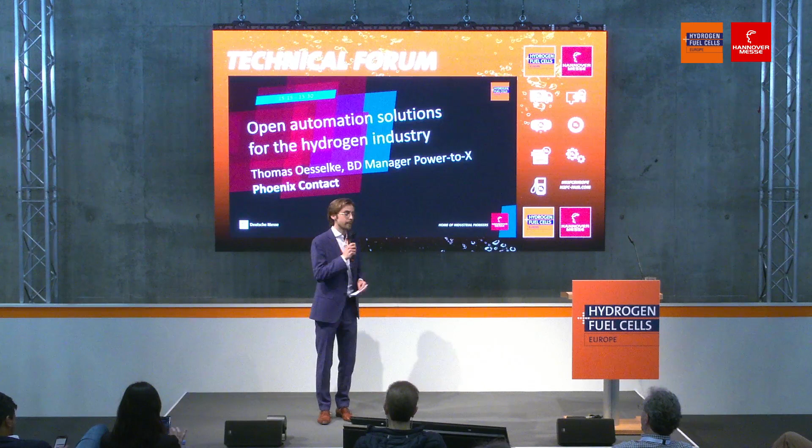The topic: open automation solutions for the hydrogen industry. On stage from Phoenix Contact, the Business Development Manager for Power-to-X. Can I get a warm applause for Thomas Oesselke? Many thanks for the introduction. So I can skip this one.

Today I want to talk a little bit about open automation systems for the hydrogen industry. I will briefly introduce Phoenix Contact, our company, and then as a second point I will talk about the characteristics of open automation systems, what's so special about that. And finally, I do not want to dig into too technical details, but I want to illustrate this in application examples, just to make it more practical for you.

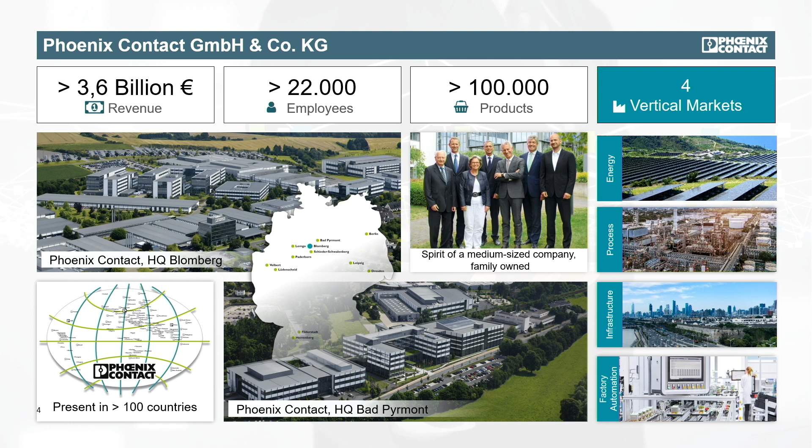Some points about Phoenix Contact. This year, this Hanover show is a very special one for us, because we are celebrating our 100th birthday. We are a 3.6 billion euro turnover company with 22,000 employees worldwide, located in Germany and still family owned. With our products from electrification, automation and connection technology, we are serving all major markets: the energy business, the infrastructure business and factory automation, but also especially process technology. This is where we also allocate Power-to-X.

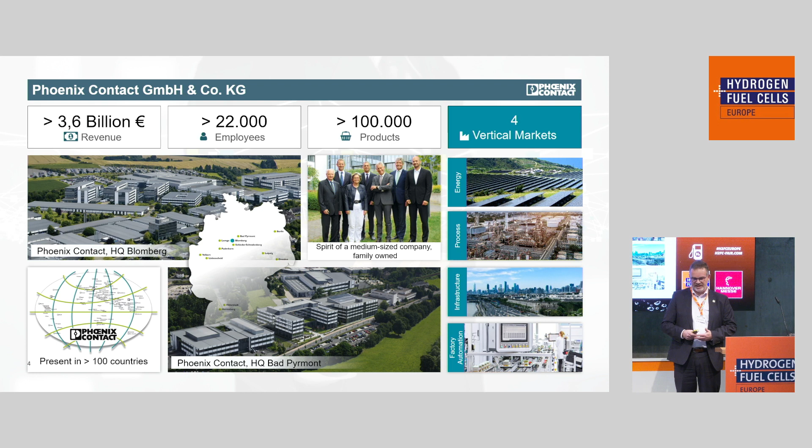Our competence for a carbon neutral future originates from our company DNA. It all started with connectivity in 1923, and over the years, the product portfolio developed into electrification, that means signal conditioning, power supplies, and finally also into automation technology. And we do not only supply components, but also services, for example consulting about functional safety, IT security, as well as intrinsic safety.

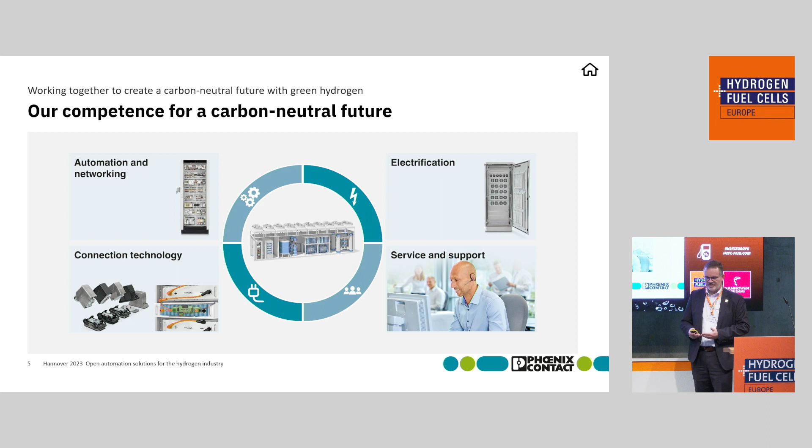So why is this so important? I guess everybody will agree we are living in very interesting times. Hydrogen is very rapidly evolving. However, the requirements of our customers, governments and regulations are also rapidly evolving. How can you cope with these rapidly evolving requirements? How can you ensure that your customer solutions maintain their functionality and availability? How can you meet new market requirements quickly, shorten your time to market, and especially, how do you react to constantly changing regulatory standards?

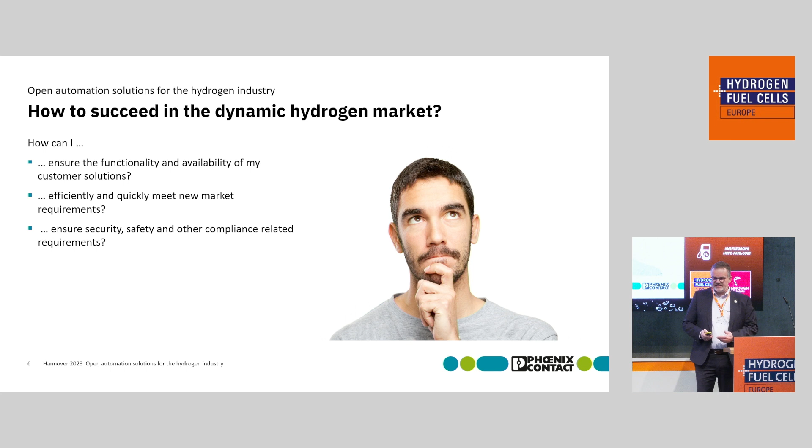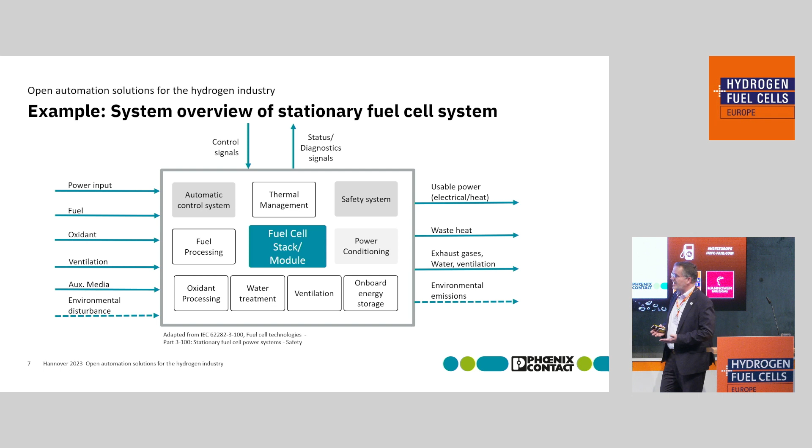Looking at the technical details, for example a fuel cell application, some of you will recognize this structure. It's adapted from the IEC 62282-3-100. The heart of a fuel cell application as well as an electrolyzer application is the electrochemistry, the stack in the middle. However, this has to be supported by lots of auxiliary functions like power conditioning, water treatment, ventilation, thermal management. So next to the heart, you also need a brain, and this is typically the automation system.

This does not only cover standard automation, you also have to deal with safety and security. You can have the ambition to develop the automation solution on your own, to keep your IP internally. But then you run into troubles like time to market. How do you react to changing requirements, to the constantly growing demands concerning IT security, functional safety, and so on? So the other idea would be, why not use an open automation system? And first the question is, what are the characteristics of an open automation system?

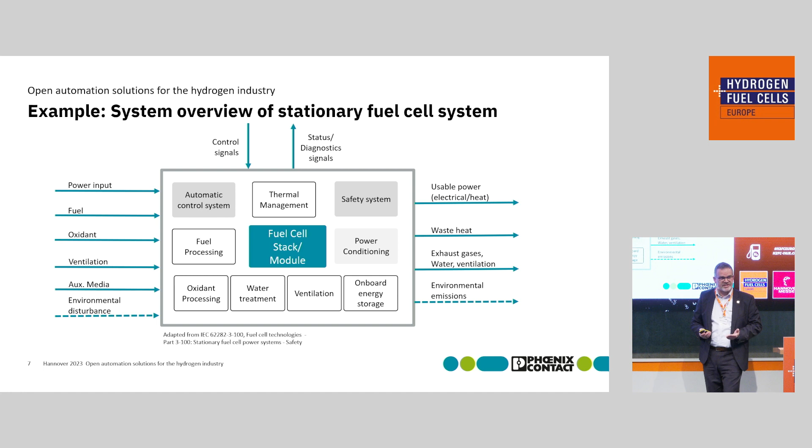First important point: open automation systems avoid any kind of proprietary technology. They are completely based on open communication standards and open technologies. That also means they support, for example, open source apps and software, and that you as a user have complete freedom of choice how you program them.

Classically, for a PLC, you have the programming standards according to IEC 61131, but today's programmers are more familiar with high-level languages like Python, C#, C++. On the other hand, especially in the development phase, you also want to use technologies like model-based engineering, MATLAB Simulink, for example. An open automation system gives you complete freedom of choice here. You can choose your preferred engineering method, and you can also use them in parallel.

A further point, however, is you may have constantly growing requirements concerning functionality, concerning performance. That means open automation systems should also offer scalability when it comes to, for example, interfaces that are supported and the performance classes, the calculating power of the platform itself, so that you can start small, but you can upscale in the future, and you do not have to discard what you have developed at the beginning.

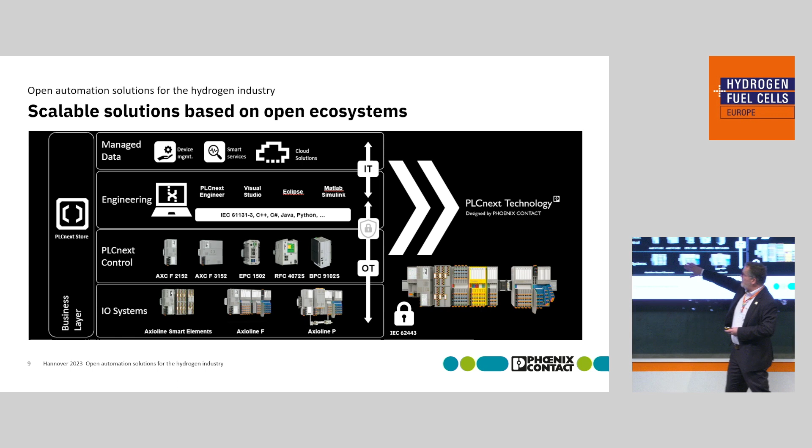And actually, around this technology, we have seen the evolution of a user community in the meantime. So there's also a very active user community that shares its knowledge, that shares its expertise via our PLCnext Store, where you can find solutions most probably for your problems that somebody else already has developed.

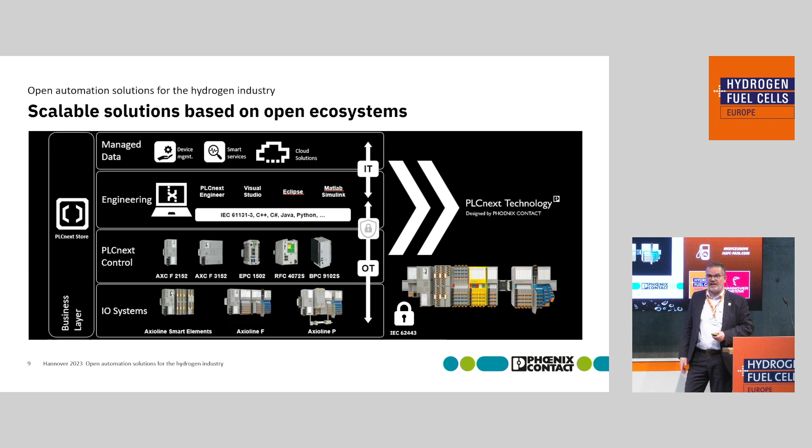Let us have a look at some application examples. One topic, and we see here a growing demand from our customers, is the decentralized power generation based on fuel cells. Typically here we have applications in remote areas, off-grid, no service personnel on location. And on the one hand, of course, as an operator of these units, you have the requirement that the complete process is controlled. But on the other hand, you also want to ensure availability and maintainability, and not only with boots on the ground directly on location, but remotely.

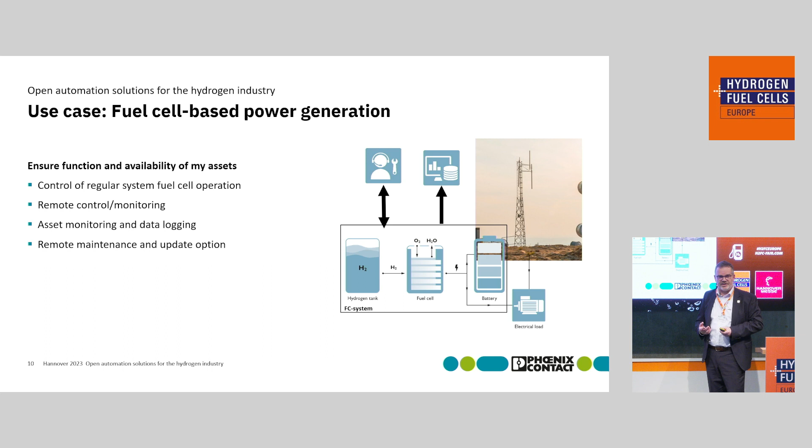As soon as people hear remote, as soon as they hear internet connectivity, some get a little bit nervous about IT security. And this again is the advantage of open automation systems like PLCnext. They have been developed according to IT security standards, according to IEC 62443. So with the system, we enable cloud-based remote maintenance as well as cloud-based remote operation in this case.

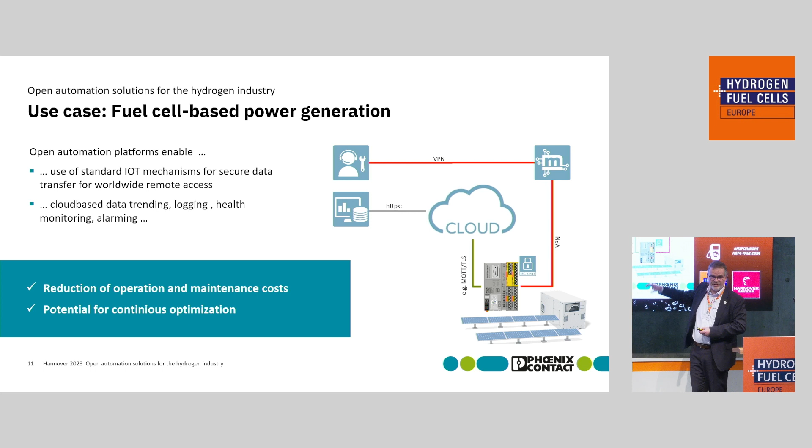So you do not have to have somebody on location right up front, but you do a first diagnostics remotely. You can do software updates remotely in a secure way, and only if really hardware exchange is necessary or rewiring, then you have to send somebody on location. But based on the diagnostics, the guy already knows what he has to bring to the site, actually.

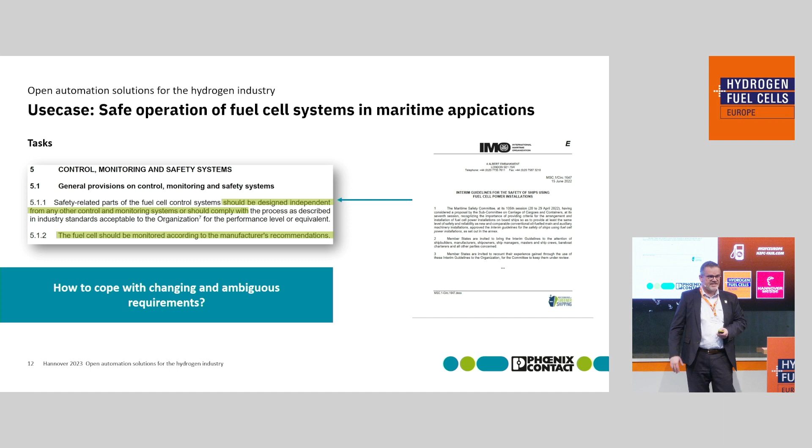Another use case is, for example, fuel cells in maritime applications. There we have a very dynamic situation concerning the regulatory requirements, especially when it comes to functional safety. However, with a modular system like ours, you can easily start with a certain setup, you can also strictly separate the standard control from the safety control. And in case of future additional requirements, you just take your existing basis, extend it by the hardware, extend it by the software, and you are done. You have a safe investment right from the beginning in this case.

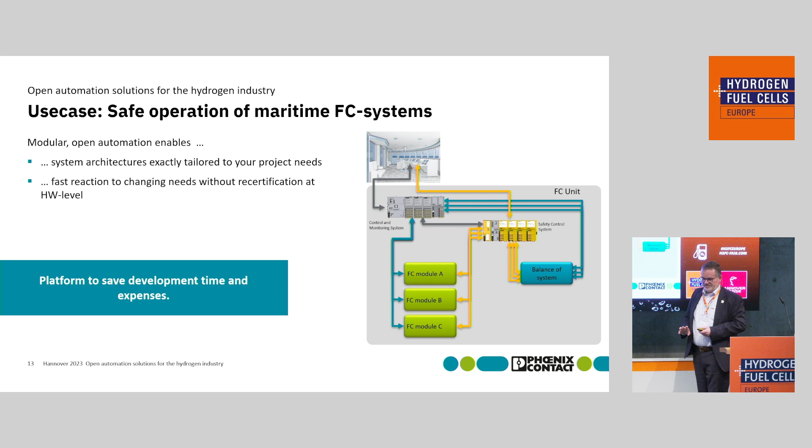Of course, this also applies to electrolysis applications where we have first pilot projects realized. And it was already mentioned in the presentation before, the big topic is integration. So all these assets are not working separate, isolated, but they have to be integrated with other assets. In the case of electrolyzers, they have to be integrated with renewable energy generation, with grid connection points, with hydrogen storage. All different assets from different stakeholders, which somehow have to work together. And because of the open automation, because of the support of purely open standards, it's fairly easy for the system integrator to bring all the different assets, all the different stakeholders together.

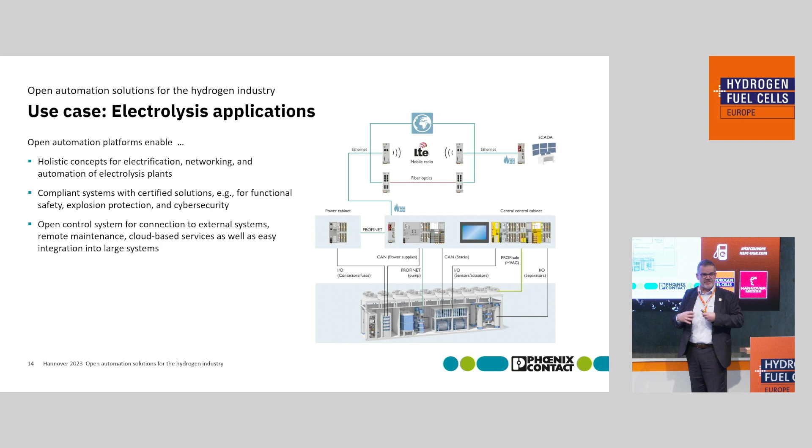So to summarize this, open automation systems, on the one hand, reduce engineering times because you are basing your development on proven technology. On the other hand, they allow quick adaptation to changing market requirements. And they also enable the integration of different assets into hybrid applications. So finally, open automation systems make your application future-proof.